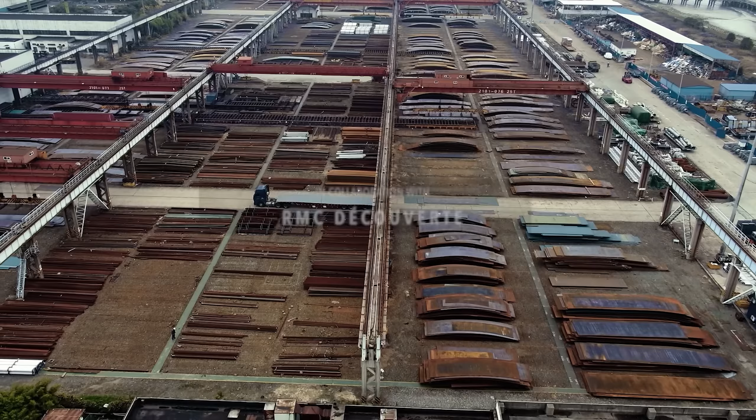Just a few kilometers from Shanghai in northeastern China, thousands of women and men work in a humongous shipyard. This extraordinary project is an unparalleled technical and human challenge. Not one, but 9 container ships are built here. These 9 steel giants are among the largest in the world. The work will take place simultaneously and will last just under 2 years.

The shipping company behind this new generation of ships is France's CMA CGM, a world leader in ocean transportation. These giants will transport an enormous amount of goods, approximately 215,000 tons per freighter.

The first is the Jacques Saade.

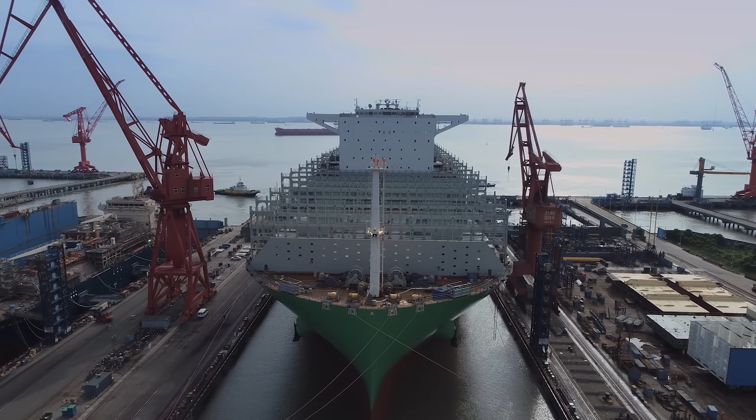These ships mark a turning point in nautical transportation due to a revolution in the engine's energy supply of liquefied natural gas.

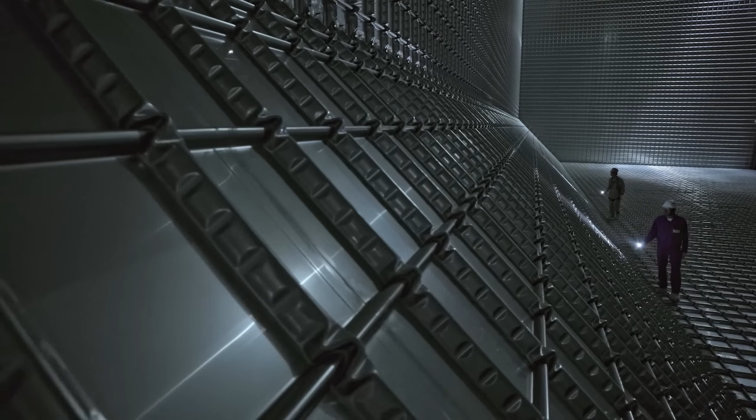A symbol of this innovation, a revolutionary tank filled with liquid natural gas, cooled to -161 degrees. The liquid natural gas is more environmentally friendly than oil. It powers a unique motor, the largest natural gas-powered engine ever built. It's just under 20 meters high, about as tall as a 6-story building. This engine drives a huge propeller, 10 meters in diameter.

Each of these ships is capable of carrying 23,000 containers. Lined up in a row, they'd cover a length of 150 kilometers.

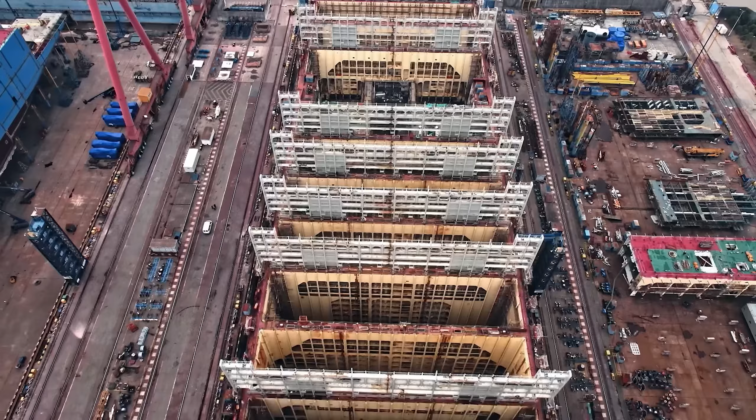We follow the construction site manager and shipboard commander into the heart of the command center and get to experience the key moments in the construction of these mega ships up close.

Will it be possible to complete the 9 giants in a record amount of time? What technology is used in such a gigantic shipyard?

The story of these container ships presents a massive challenge. How do you build 9 ships in less than 2 years when it normally takes 18 months to build just one?

This gigantic shipyard was built to make it happen. There's enough space here for all 9 ships and the necessary infrastructure.

The shipyard is located on the other side of the world, in China, just outside the city of Shanghai on Changxing Island. The shipbuilding facilities extend almost 4 kilometers.

There are 3 dry docks in the shipyard to get as much done as possible at the same time, so the ships can be worked on one after the other.

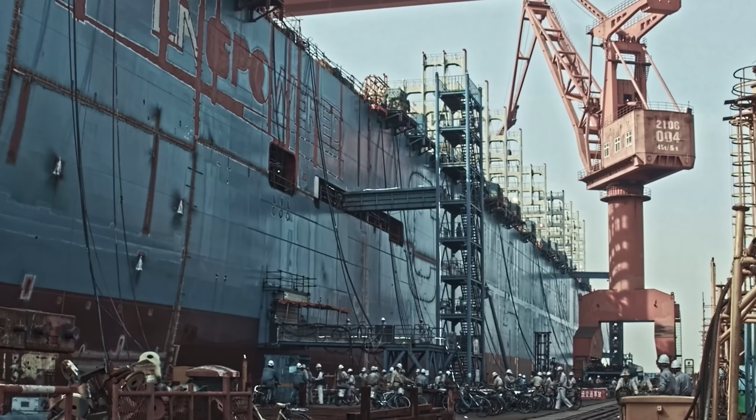There aren't many giant shipyards like this, where several dozen megaships are built each year. Most of them are located on the Asian continent, where there's a significant pool of expertise. The shipyard is like a city where more than 6,000 tradesmen, technicians, and engineers work from all over the world.

The challenge is enormous. Each ship will be able to load up to 23,000 containers. A first. The dimensions set completely new standards.

400 meters long, or the length of 4 soccer fields. 61 meters wide. Just under 78 meters high, that's higher than the Statue of Liberty. Without cargo, a ship like this weighs 70,000 tons.

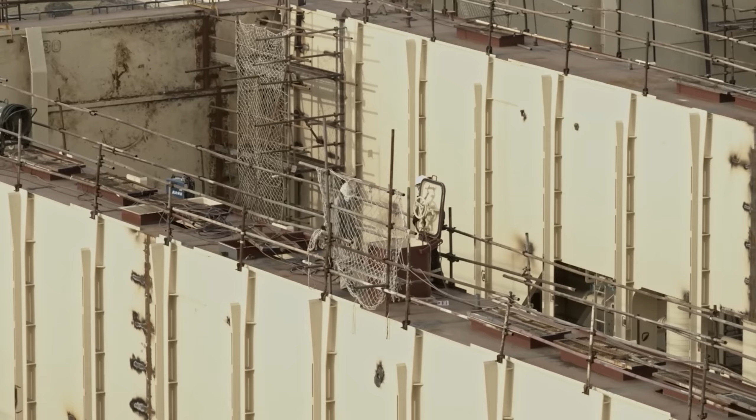Intense vigilance and rigorous organization are essential at all levels for these behemoths to be completed in time.

In one of the shipyard's many warehouses, workers are building a section of the ship called a block. A special system is used to coordinate the production of the 9 ships, similar to a giant Lego.

The ships are assembled in the dry docks in huge basins. One by one, the blocks are delivered and welded together, an extremely efficient construction method. Each block has a precise function and specific place in the overall construction of the ship.

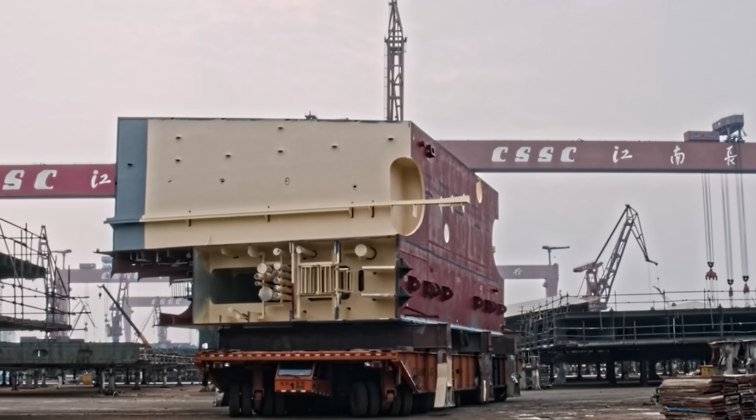To produce these giant vessels without wasting time, the construction plan was broken down into thousands of independent blocks, like an assembly line. And to save even more time, everything's already installed: piping, fittings, ready to be connected.

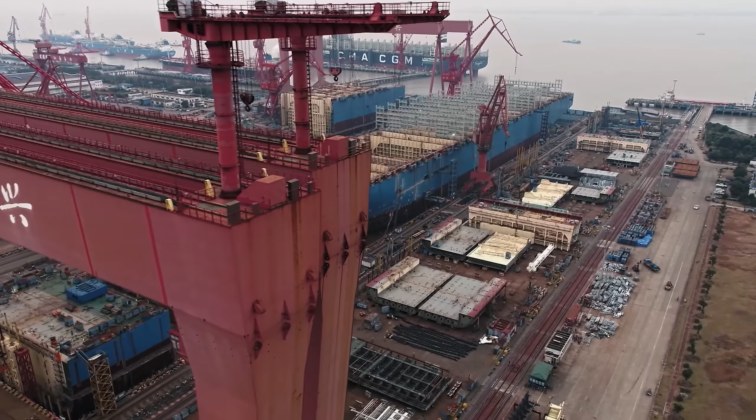These huge parts are brought to the center of the shipyard near the dry docks, where they're mounted on the part of the ship already built. Like a skeleton, every single part of the ship becomes visible.

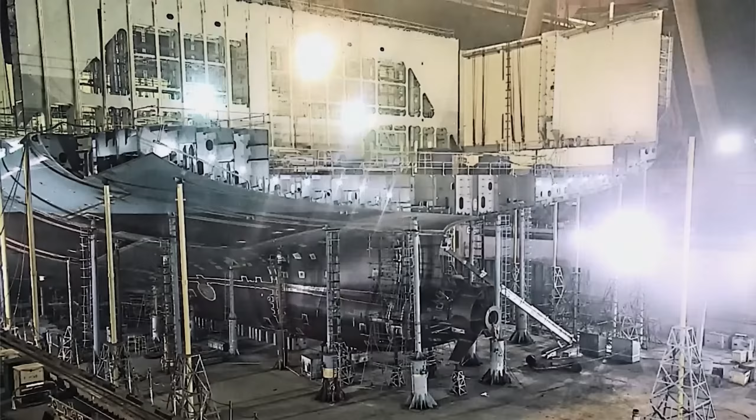All parts need to be assembled with surgical precision.

Part of the tail, consisting of 5 blocks, slowly moves towards the basin like a spaceship from Star Wars. 790 tons, the weight of 2 high-speed trains, floats in the air.

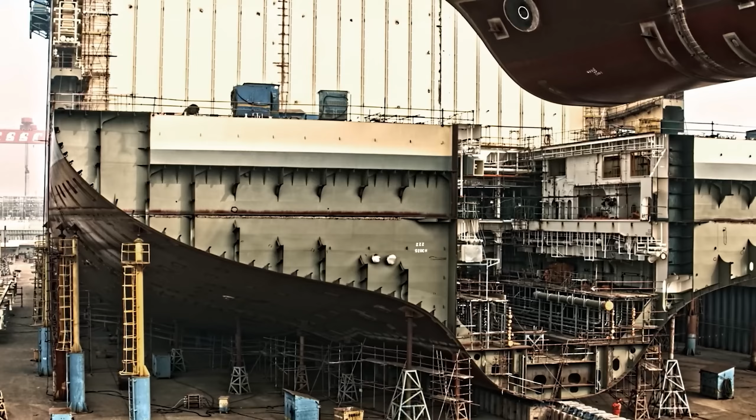No problem for the massive port cranes, which can lift up to 600 tons. 2 cranes work together, and the assembly of the massive parts has to be perfect.

But how's it possible to build the ship without blocking access to the bottom of the ship? How can individual parts be protected from getting damaged on the ground?

The trick? Small, incredibly stable support beams, known in technical jargon as pawls. The pawls are placed on the bottom of the basin so the ship can be placed on top. A pawl consists of a concrete block with a metal structure attached on top.

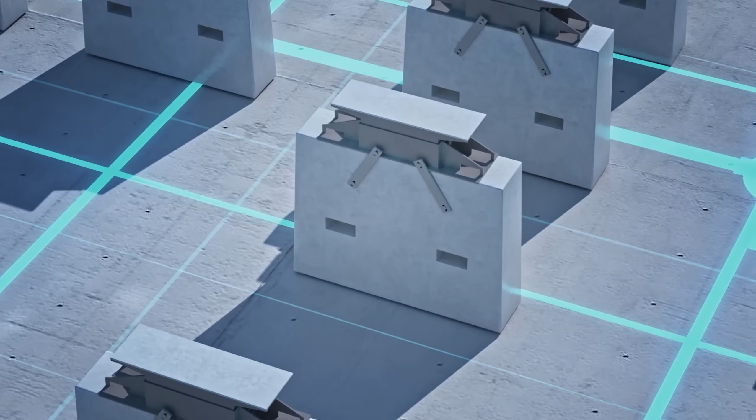Each one can carry 200 tons without damaging the hull. Together, the pawls support the weight of the completed ship, nearly 70,000 tons. Everything's ready for the next mega ship to be assembled.

In the beginning, there was sheet metal, 12,661 steel sheets. They're the raw material for the structure of container ships.

Just like cells in the human body, they're delivered by sea, by the hundreds.

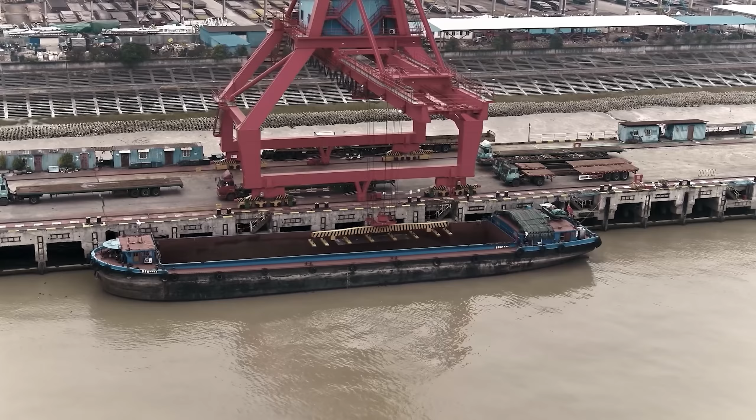The structure of the ship is made of these sheets, mainly steel, a material that can be used over and over again.

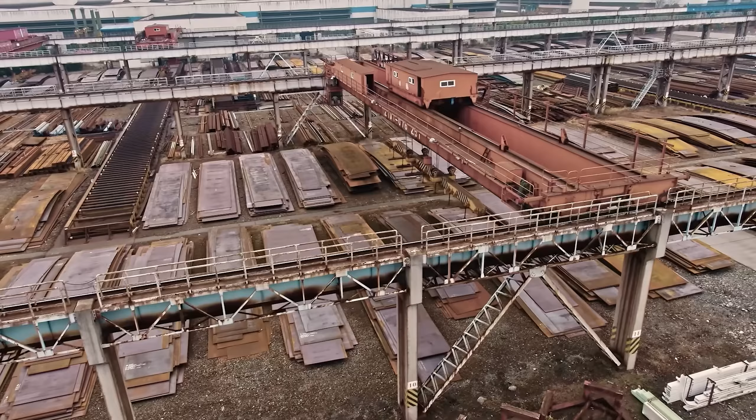But why are increasingly larger container ships still being built? Reducing the cost of transportation isn't the only reason, environmental factors also play a vital role. If 23,000 containers can be transported by one ship, the life cycle assessment of each of these containers improves.

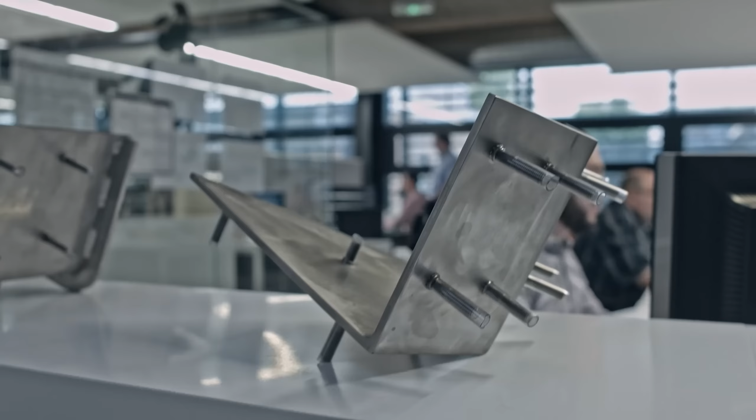But the engineers also face a second problem, a ship's independence. The majority of routes run between Asia and Europe, so fuel supply is an important core issue.

The fewer stops a ship has to make along the way, the lower cost and travel time. Container ships powered by liquefied natural gas have to cover enormous distances without any intermediate refueling. Storing such an enormous amount of liquefied natural gas on board presents a complex challenge.

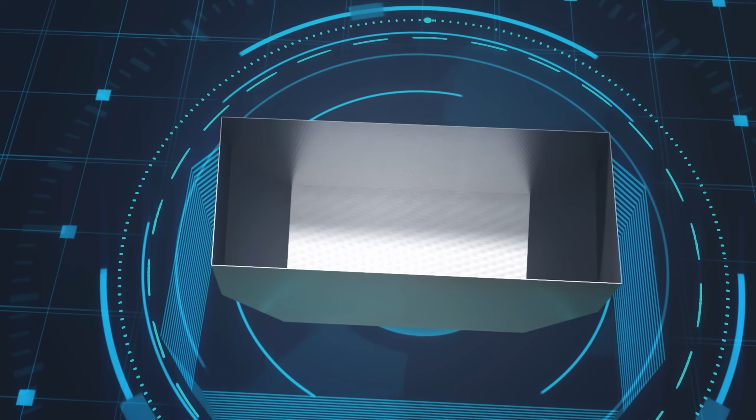The French company GTT, world market leader for liquefied natural gas tanks, developed a customized solution for this project. It's the largest tank ever built. 51 meters long, 27 meters wide, the tank measures 18,000 cubic meters, as much as 6 Olympic swimming pools.

The liquid gas offers a huge advantage and solves a familiar problem.

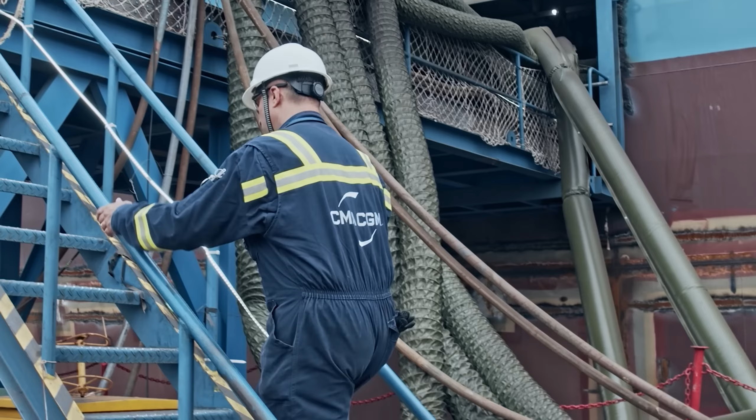After a 6-month phase of block assembly, a new stage begins: installing the tank. To do this, a block must be completely insulated, a lengthy and critical stage that requires meticulous precision, and which can last up to 9 months.

How can the natural gas be perfectly insulated at minus 161 degrees, in a tank exposed to wind and weather on the high seas?

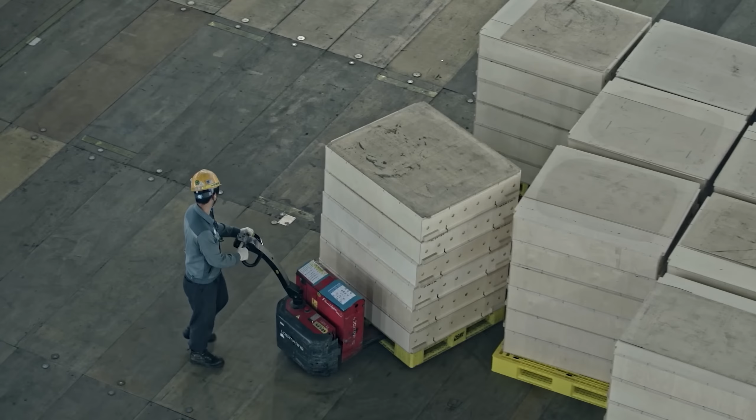To accomplish this, 27-centimeter thick sheets of polyurethane are used. They protect the outer walls from the extreme cold. The panels are glued to the walls of the tank and then fastened.

That's why the tank is divided into several levels, so workers can cover the entire surface of the huge hull, a work phase that takes 7 weeks.

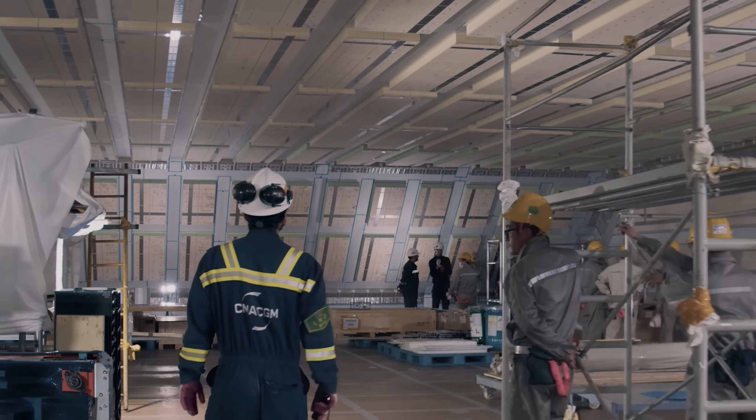The first layer of insulation is ready, but is it absolutely airtight too? Even though it's always a race against time on the construction site, the crews still have to make sure everything's working properly and check every single seam. The work is divided into inspection zones.

A leak was found here. In such cases, technicians use an efficient method, which is surprisingly simple.

Water. The affected section is covered with soapy water. Then this plexiglass box is used. A vacuum is created inside with a pump. If air bubbles escape through the inner wall, it proves the seam isn't completely airtight.

Then you need to glue that spot again, of course in a timely manner. It's important not to waste a minute. The procedure needs to be repeated on the lower levels.

The countdown continues. After 16 weeks, the first stage of installing the tank is complete. A second, much longer stage is about to begin.

The tank is the energy reservoir of the ship. From here, the liquefied natural gas is routed to the engine.

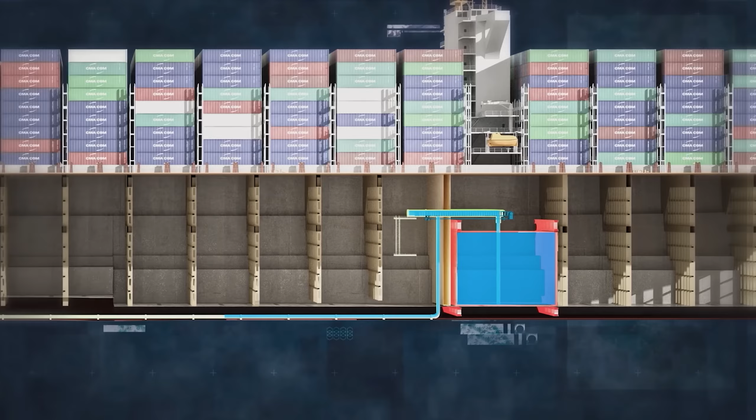The problem is, both the gas volume and the distance to be covered are extensive. Because of balancing, the engine is located at the other end of the ship. So a suction mechanism needs to be built into the tank.

Here it comes. Its weight, 25 tons. Its task, to pump the gas to the engine. Its name, the gas mast.

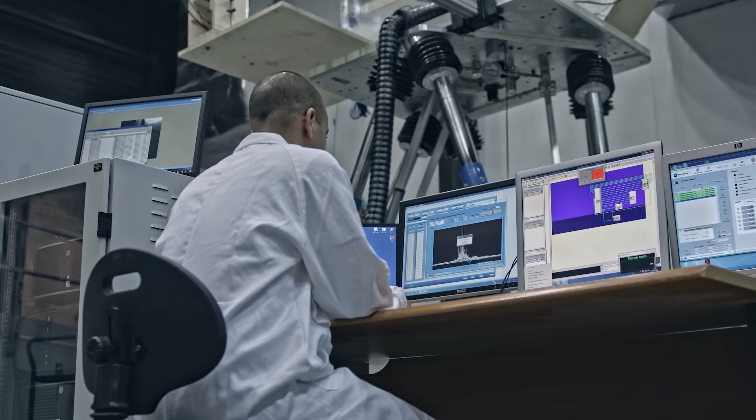The engineers had to design a mast that is virtually indestructible because it needs to withstand extreme conditions in the tank.

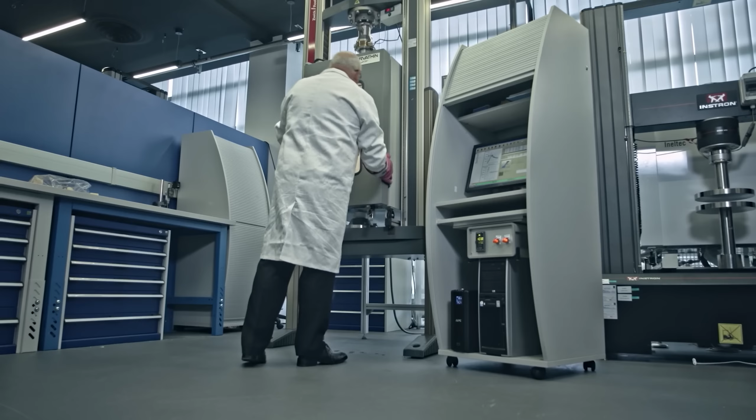The mast needs to withstand freezing cold and enormous pressure without moving even a millimeter, and do that for several years.

Work continues at the enormous Shanghai shipyard. A tank obtained its first layer of insulation on one of the container ships. Now a second one can be attached, but the gas mast needs to be installed before that.

It's lowered into the tank from the top. The mast is 6 meters wide, and the opening through which it's lowered is barely larger.

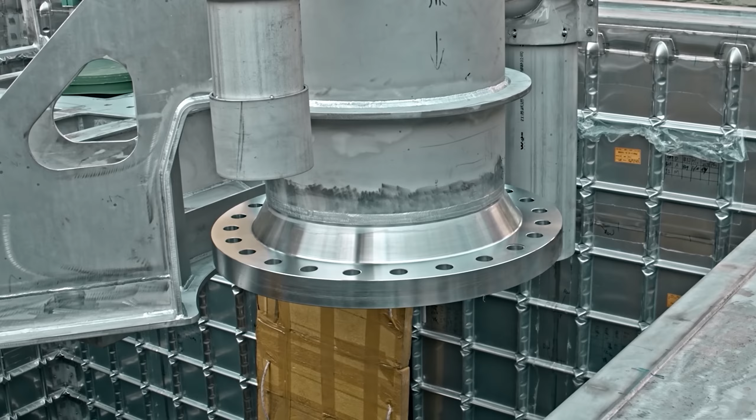The mast is lowered centimeter by centimeter. Around 15 workers are involved in this delicate operation. The metal monster floats in the air.

Finally, the mast is now securely attached. There are 4 pumps at the lower end, just a few centimeters above the bottom of the tank. They pump every drop of the liquid gas.

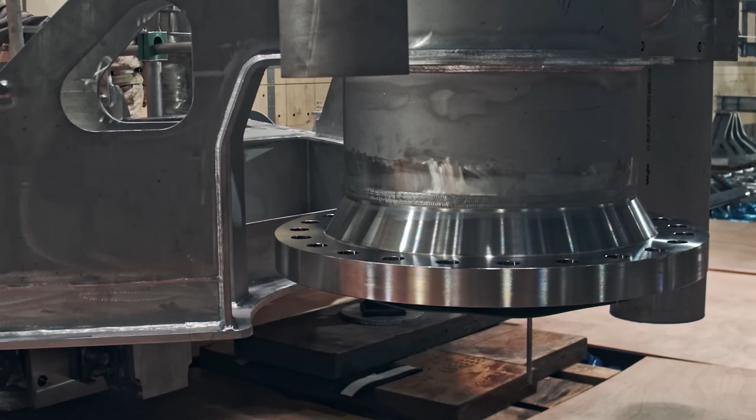A device that's proven its reliability. Now the tank's last layer of insulation is added, the so-called primary membrane, a 1.2 millimeter thick sheet metal. It's what gives the tanks their waffle-like surface structure.

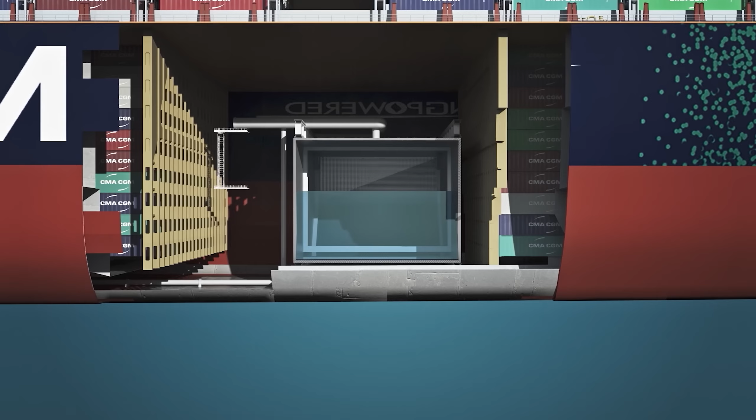This membrane is ultra-thin and at the same time incredibly efficient. The intense cold of the liquefied gas causes the steel to warp, so it's crucial that the structure itself is flexible.

The embossed membrane with its wavy edges offers the perfect solution.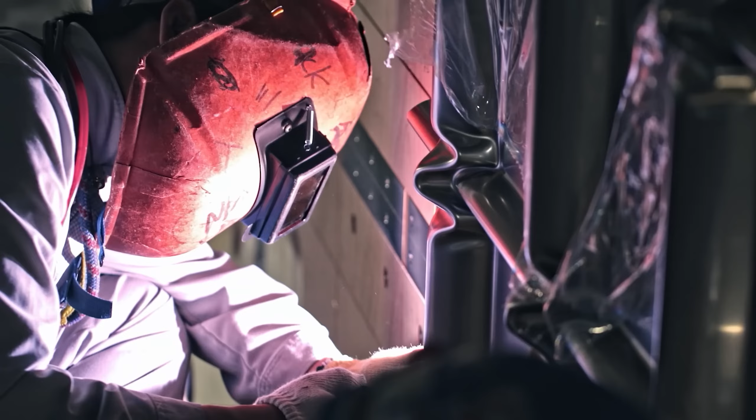Weld seams totaling over 6 kilometers run through the tank. They're extremely resistant. The same technology is also used in space travel. After 8 months of work, the tank is finally ready.

A final inspection takes place before it's finally closed. Nothing, not the smallest speck of dust, is allowed to be left behind. The ship should be ready in 4 months.

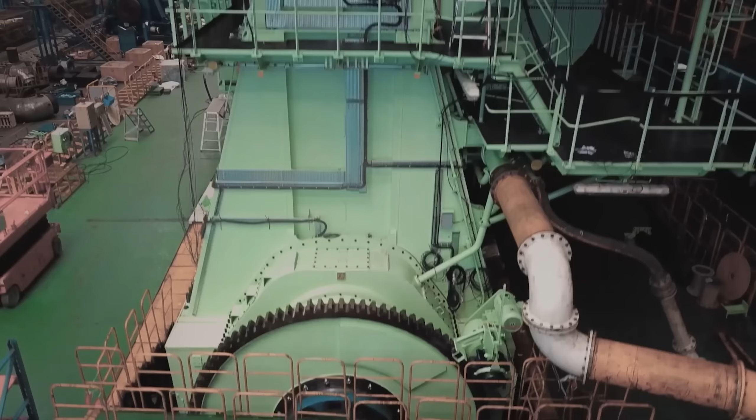Today, 3 months after work began, is a special day for the engineers. They've come to the mainland because one of the core pieces of the project is being completed in these halls today: one of the most spectacular individual parts of the ship, the engine.

With its 24 meters length, 18 meters height, and a weight of 2,000 tons, it generates an output of 85,000 horsepower.

A genuine independent construction. Before the engine's mounted in the ship, it's tested to the extreme. The engine's pushed to its limits, to 110% of its capacity.

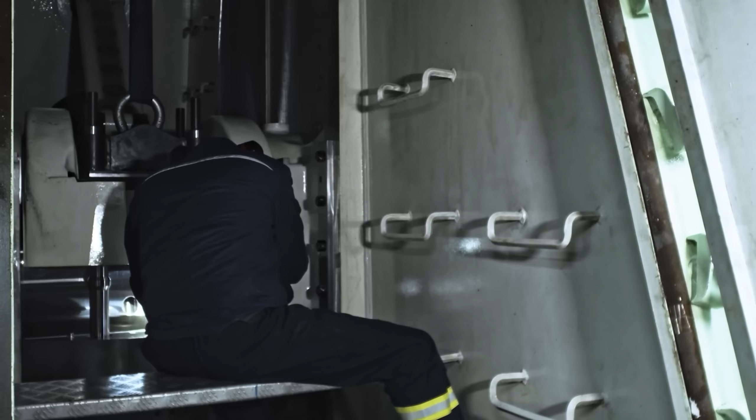This test is absolutely necessary to check the stability of the motor in extreme situations. Repairing this massive component on the open sea would be extremely complicated, and it was actually developed to simplify the work of mechanics. If there are any serious problems, mechanics can enter here to the center of the engine.

But the tests went well. The engine passes with flying colors. It'll be installed in one of the 9 container ships in a few days.

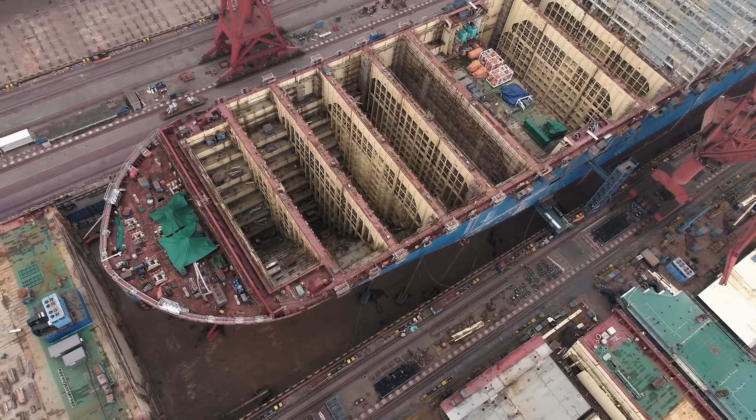Nine ships. That's 9 engines that have to be built in a very short amount of time. So they're manufactured just in time. The second engine's already being assembled just a few dozen meters away from the first engine.

A critical step is about to be taken. The main piece will now be delivered, the crankshaft. The crankshaft is the axle that connects the engine to the propeller and powers it. Its weight, 220 tons. It's mounted in the lower part of the engine and moves with the help of 12 pressure pistons.

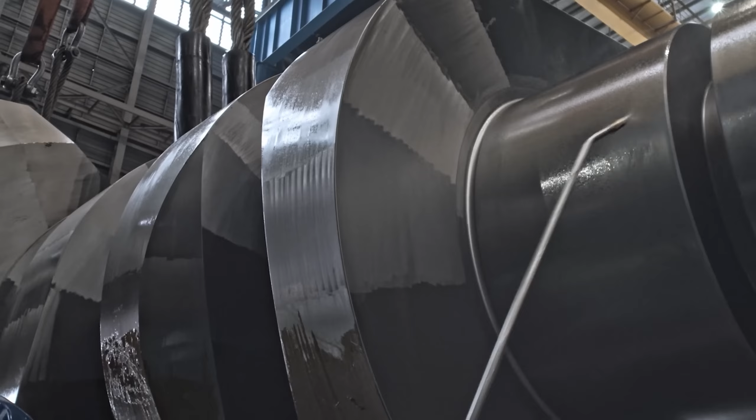First of all, the part is thoroughly oiled. The pressure pistons are connected later when the crankshaft's in place.

This is genuine engineering. Almost 220 tons are waiting to be installed. This is done with the help of extraordinary cranes.

So far, this is only half of the crankshaft. The 12 pressure pistons each have a diameter of 1 meter, that's 10 times more than a car. When running, they move 3.2 meters up and down.

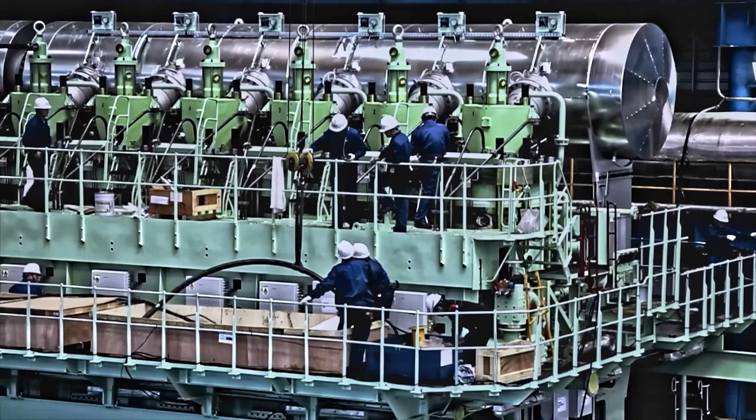The engine's now mounted onto one of the ships. But before that, it has to be taken apart to be brought on board. And it's not that simple. No vehicle in the world could move this 2,000-ton massive part.

That's why it's separated into 6 parts, transported individually by ship to the shipyard. This is the main part, it includes the crankshaft.

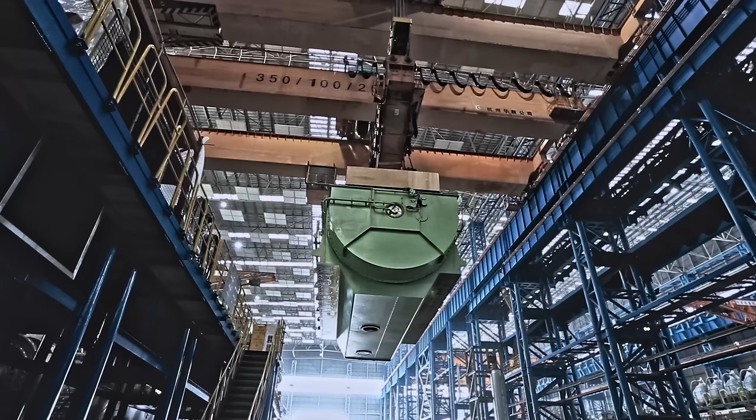The crankshaft is carefully lowered. With its weight of 220 tons, any unprotected contact with the ground would damage the metal, so it's carefully loaded onto beams. Even though the beams are temporary, they're still attached carefully.

Now this highly sensitive piece of the engine is loaded onto a peculiar cart.

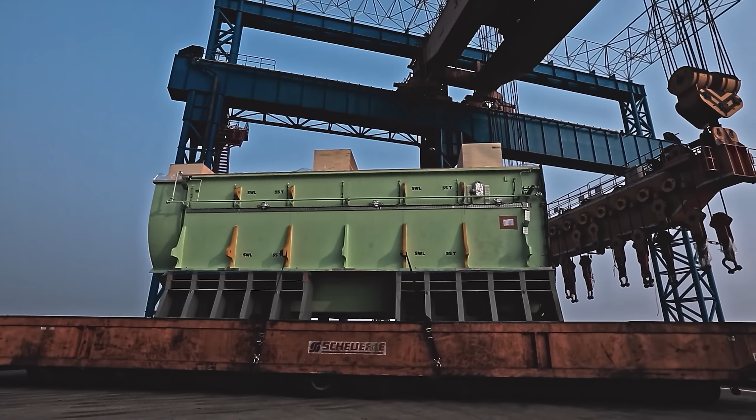To endure such a great weight, these transporters have up to 140 wheels. They weigh more than 10 semi-trucks, and they're controlled by remote control from a distance. Because safety's a top priority, the transporter only travels approximately 5 kilometers per hour.

The ship's already waiting when the transporter reaches the barge. The engine's loaded as slowly as possible. Everything's ready to transport it to the shipyard.

To get the container ships moving, which can weigh up to 300,000 tons when fully loaded, the propulsion system has a propeller with a very distinctive form. Their streamlined shape delivers increased performance.

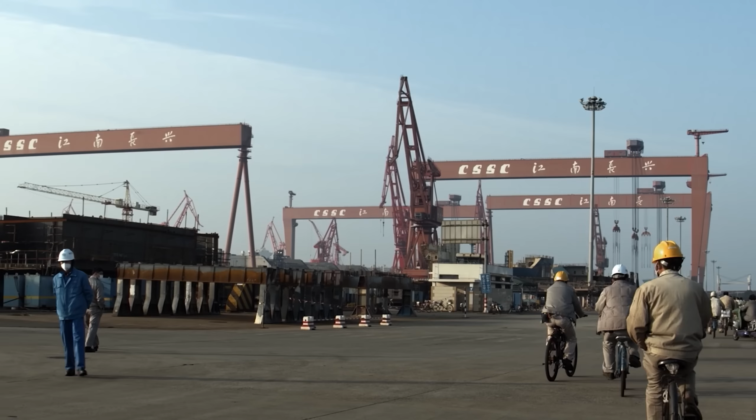Back on the island, in the heart of the shipyard. This part was designed in Germany and made in China.

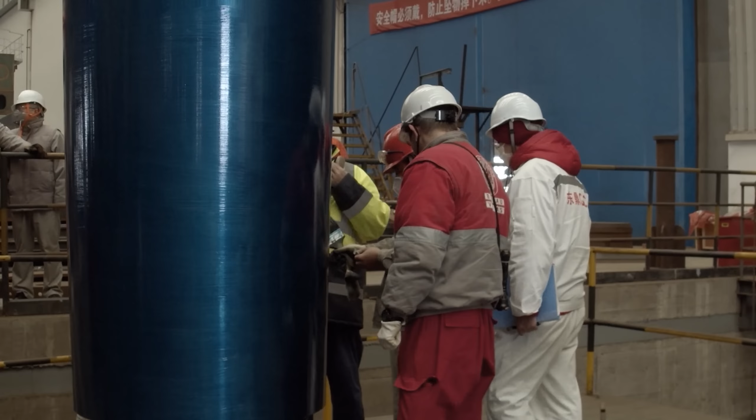In other words, the two parts have to be 100% aligned. There can't be any discrepancy whatsoever. At full speed, the slightest inaccuracy would have irreparable consequences. A dye is used to perform the test, methylene blue.

Now the two parts come together. The blue color shows exactly where the contact points are.

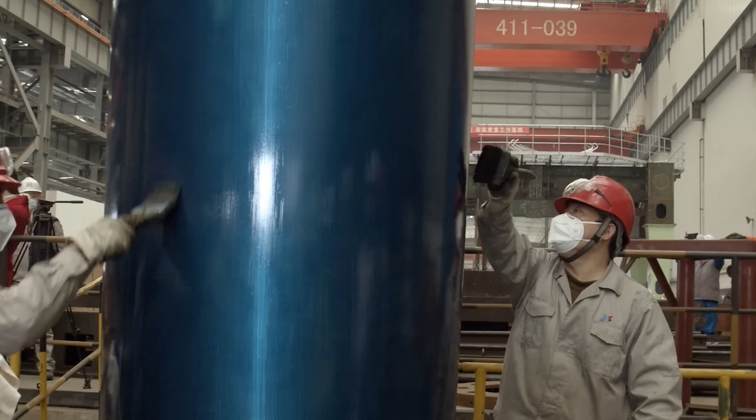A job of absolute precision, which can't be tampered with. 52.5. 5, 2. Okay, now 52, it's okay.

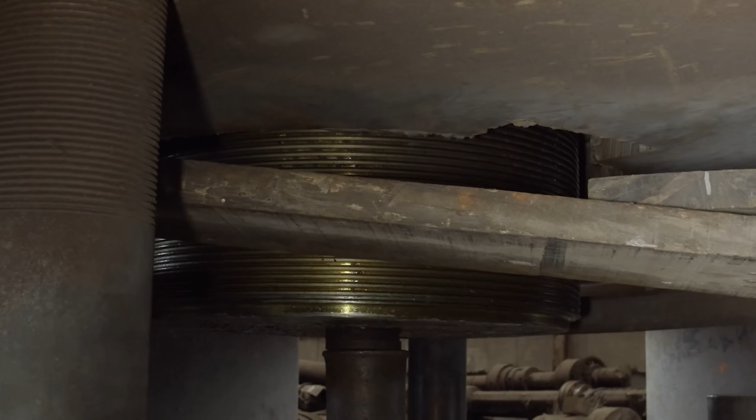The propeller shaft is raised one piece at a time. The propeller and propeller shaft fit perfectly into each other.

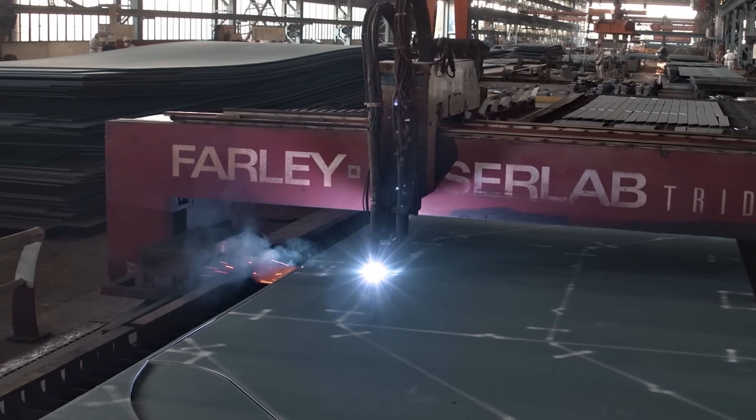The metal's cut with a laser beam, generating heat of approximately 18,000 degrees Celsius. It cuts the steel like butter. In total, more than 880 kilometers of metal sheets are required for one ship. That's the distance between Paris and Berlin.

There aren't any high-tech robots here and very few automated processes. Everything's done with industrial machines and human hands. Every worker has a place. This is where the first parts of a new ship are taking shape. These plates can now be assembled together to form new blocks.

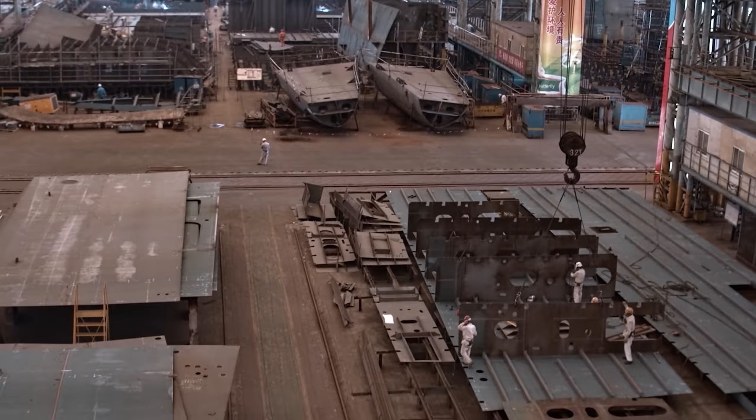Work at the shipyard is carried out in several stages: by design, expansion, and inspection. And now I want to see this, if it's good. It's now time to assemble the last block.

It's already waiting a few meters from the basin. André supervises the operation. The block is slowly lifted up, hovers in the air for several minutes, then fits perfectly in its place in the bow of the ship.

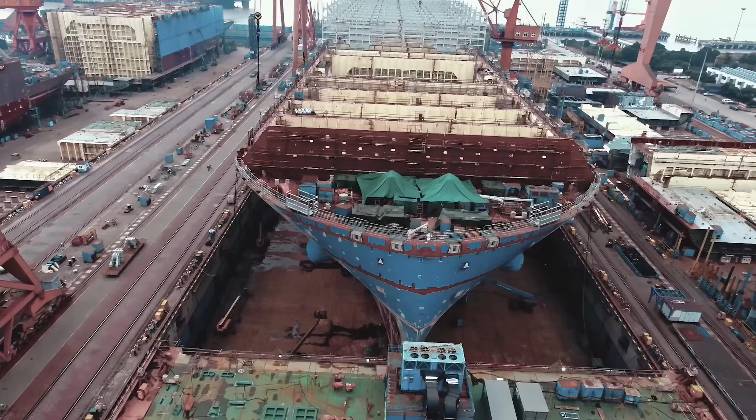Now it just needs to be welded in place, and the ship will be completely finished. These ships are gigantic metal construction sets, but they're also extra-large patchwork rugs. The connecting seams stretch across the entire hull like scars.

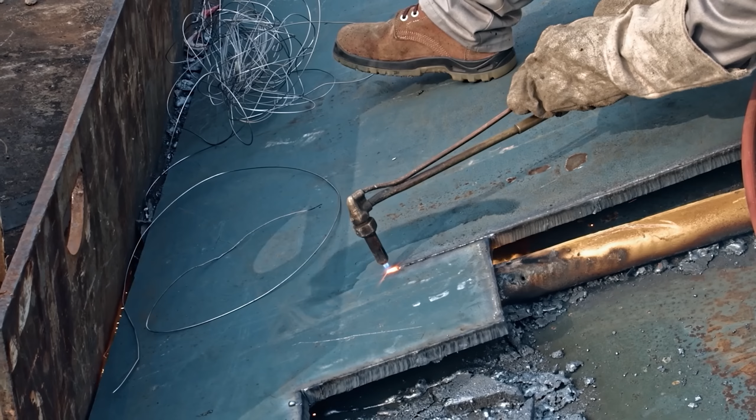Sparks are flying all over the shipyard. Thousands of sheets are welded at the same time. Once the ship's at sea, there can't be any structural weak points. Like a weak link in a chain, the slightest mistake at sea can mean disaster. That's why every weld is meticulously inspected and redone if necessary.

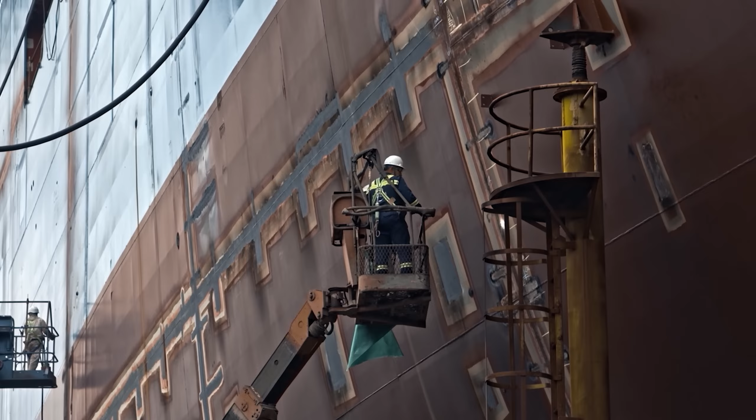The simultaneous construction of the 9 container ships continues. Now it's time to install the propeller. The installation on the lower part of the hull is a delicate matter.

The propeller was cast in one piece in a specially made mold. With its 92 tons and 10 meters in diameter, it can't be transported by air. So it's transported to the shipyard by ship. The last meters of the journey are conducted by massive cranes, which carefully load the propeller into the basin.

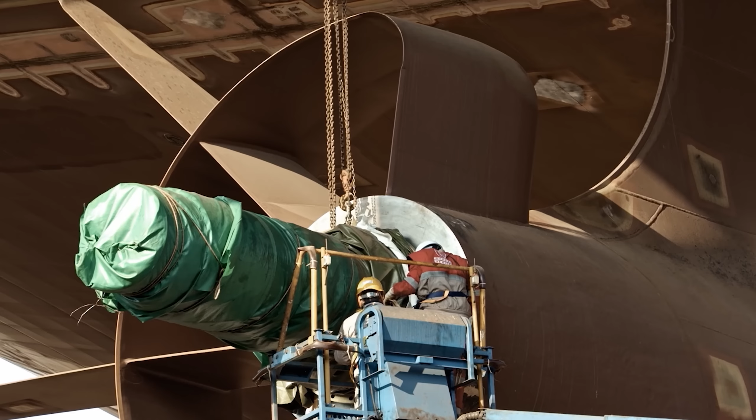The first thing that has to be done is to prepare the propeller shaft. Meticulous wrapping protects them from contamination. Nothing should interfere with the installation of the propeller.

Now the propellers slowly moved forward. Then, meter by meter, lifted and aligned. But how do you attach a 92-ton propeller? How do you manage to keep these massive parts completely still?

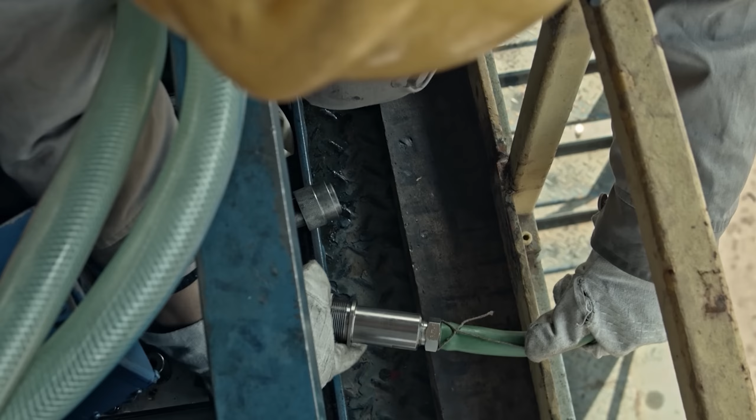The answer? Oil pressure. The men don't help. The propeller simply moved into place by oil pressure, where it's finally attached. Now the oil's injected. It's filled through this huge nut, and the propeller is precisely attached to its axis.

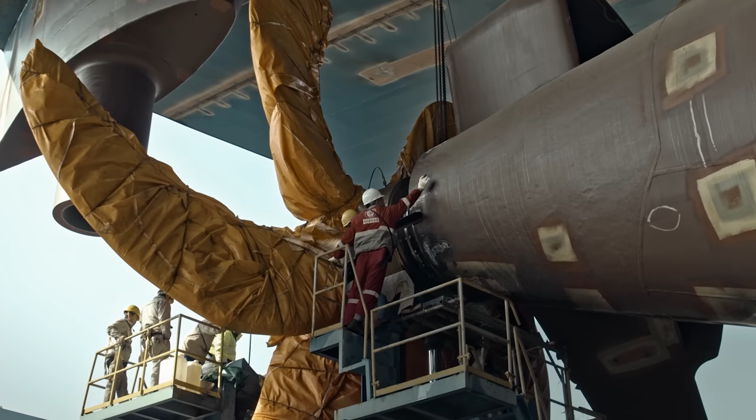The oil pressure increases as the entire team watches carefully. It's under constant observation. Adjustments take place directly on the hull, the old-fashioned way. Once the propeller's attached, the oil is collected to be reused later. Now the screw can be uncovered.

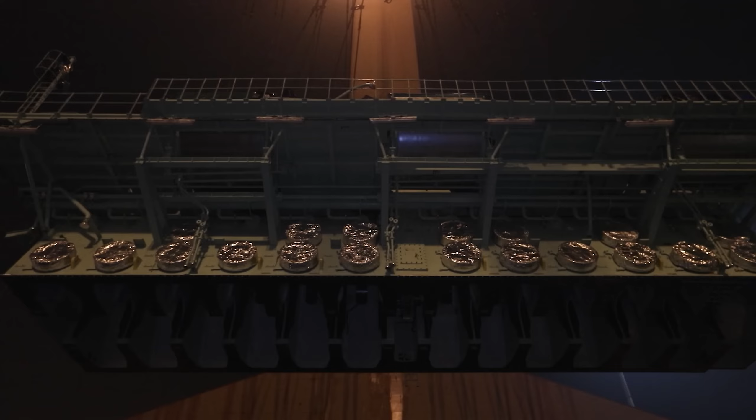Tonight, this brand new engine is reassembled. This time, however, directly on board the ship. This is the lid, the upper part, the last missing part of the engine. The ship has to be able to transport hundreds of thousands of tons of goods without anything slipping.

The massive piece hovers over the ship at a height of more than 20 meters before it's lowered into the heart. Everything's already prepared. The crankshaft and pressure pistons are just waiting for the last part of the engine to be inserted.

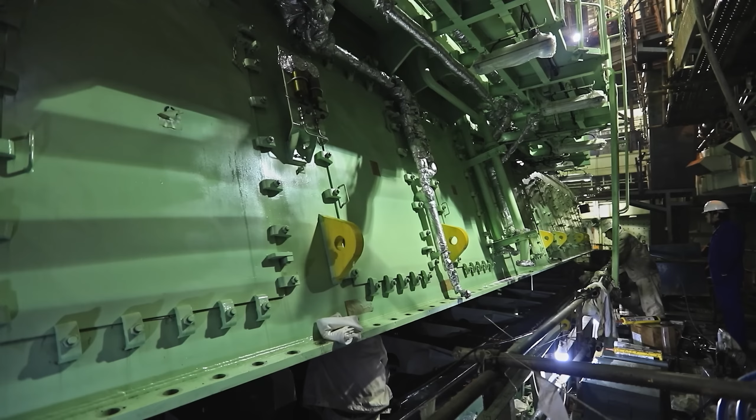Now the parts just need to be attached to each other.

The ocean's a particularly hostile environment where the hull is put to the test. The salt and friction erode the paint. It's possible that entire layers of paint peel off. This clearly slows down the ship. The ship needs to put more pressure on the engine to maintain its cruising speed.

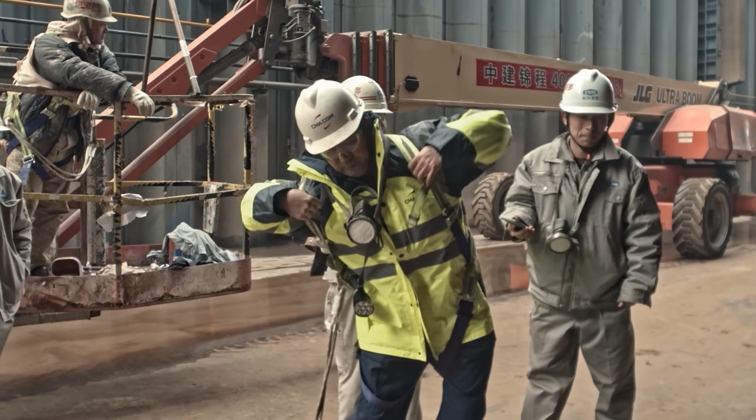Before applying the last layer, it's crucial to make sure the previous layer is perfect. And that's never the case on the first try. You can always find a mistake somewhere. An engineer examines the outcome himself. To be able to perform a comprehensive inspection, he climbs onto the freight elevator.

But an inspection like this can be dangerous. Whoa, whoa, whoa. Go down, down. At this altitude, the wind sways the gondola quite a bit.

If the ship's side isn't perfectly smooth, the spot is leveled with a grinding machine and repainted. So this is the remaining area. Once they cut, we will do the repair one more time. An enormous job that has to be carried out on each of the ships.

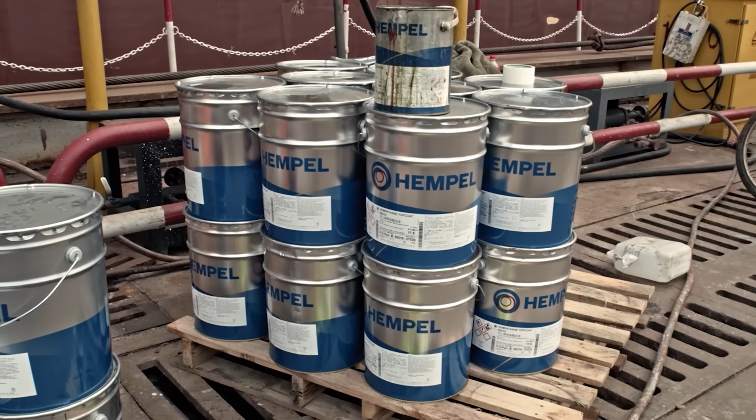The total area to be covered is around 950,000 square meters. That's the length of 135 soccer fields.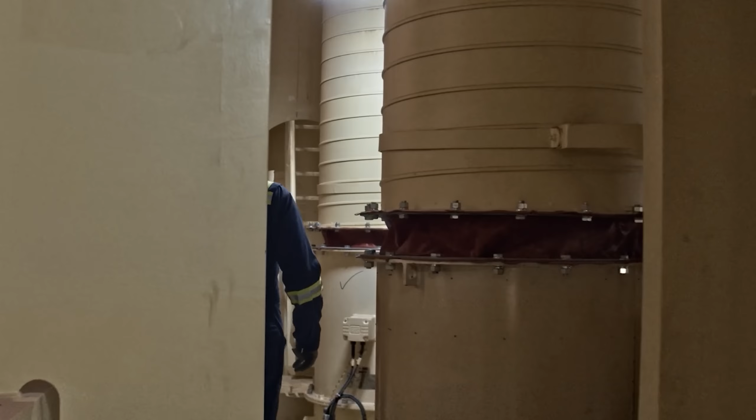Of course, the cargo also contains fresh products like fruits and vegetables. You need refrigerated containers for that. They're connected to the ship. The hold has to be permanently ventilated because it produces heat.

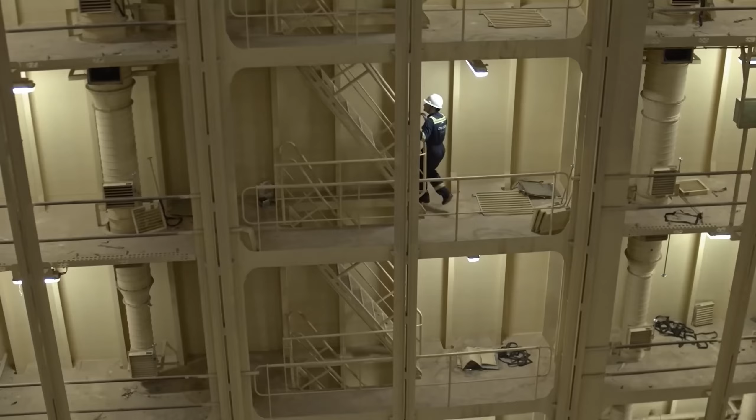The system's functionality is tested beforehand using a very particular method. A so-called container dummy is used for this, a replica that has the same dimensions as the real containers.

An engineer checks to see if there's a problem. The slightest twist or any other distortion of the rails is noted and corrected.

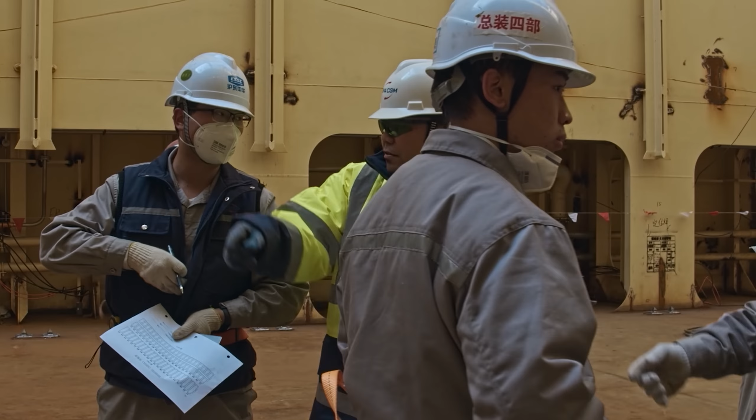The moorings in the ground are also inspected. The cargo shouldn't move at all while being transported. But everything seems to be under control. Today, the engineer of the shipyard has done his job.

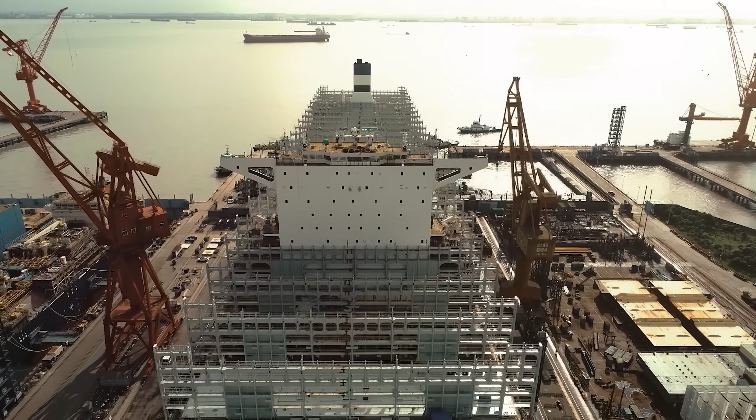Whether in calm or stormy seas, nothing's allowed to move. The containers must be prevented from falling into the ocean. To prevent this from happening, they're attached to the ship's structure above deck and to each other. This is done with so-called twist locks. Nothing can happen using this system, no matter how high the waves, no matter how bad the storm.

The place where everything on board comes together, the center, the brain, is the bridge. Matthieu's looking at it today. This is where the ship is steered when out on the ocean.

The command bridge is still under construction. Workers are now laying the last cables and connecting the navigation devices.

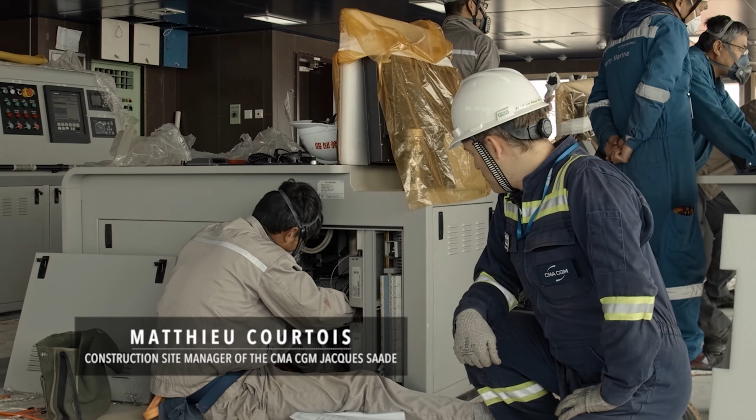In addition to all the high-tech gadgets, you'll also find a few very classic navigation aids.

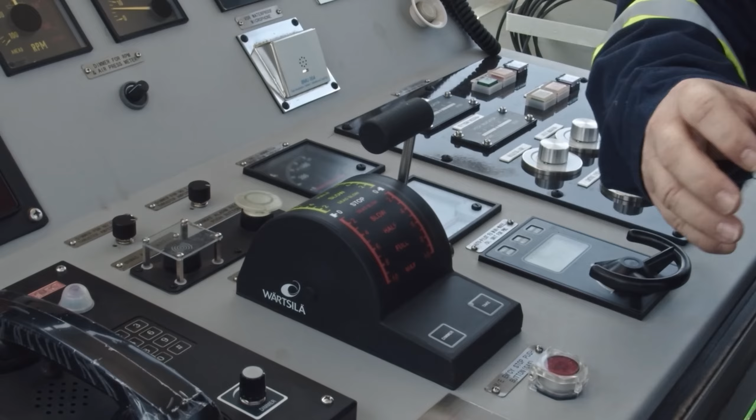A maneuver that requires a lot of sensitivity. It's executed at a speed of 0.4 kilometers per hour. The problem is, despite the low speed, you can never see the bow and stern of the 400-meter-long ship at the same time.

To solve this problem, a system called Smart Eyes is used. It contains 8 cameras distributed around the ship, providing an unimpeded view of the entire length. This allows the container ship to be moved close to the dock wall without great risk.

After a busy year and a half, the construction of the first container ship, the Jacques Saadé, is coming to an end. The other 8 ships will be completed over the next 8 months.

For the first time, the Jacques Saadé goes out to sea. There's a 15-day test phase where all the equipment is tested under real conditions. The tests are controlled from the command bridge, where all the equipment is interconnected.

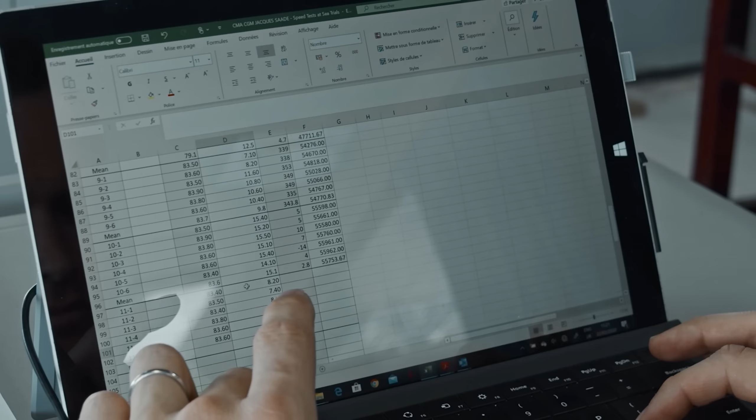But the equipment alone isn't enough. It's only an aid to navigation. A machine can never replace a human being. The experience of the team is what matters.

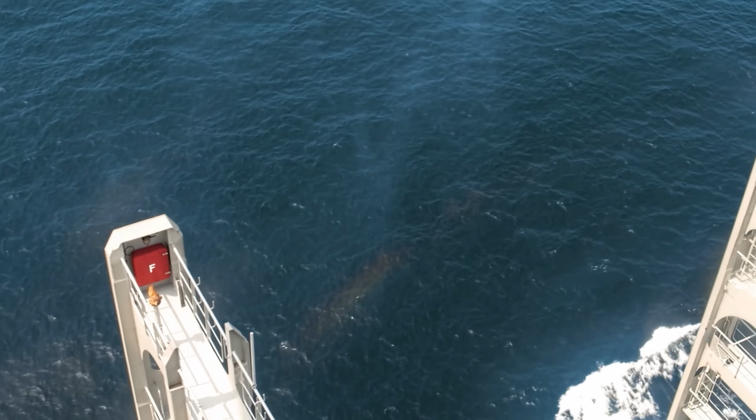When the engine's off, the ship should stop moving. Now comes one of the most symbolic pieces of equipment, the anchor, which of course is also inspected. Like the ship itself, the anchor is enormous.

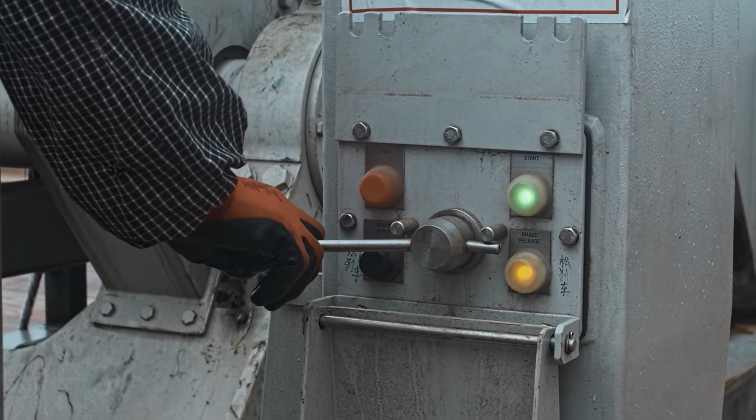And that doesn't even include the chain links. Each individual link weighs 300 kilos. The total chain weighs about 372 tons. That's more than the weight of 60 African elephants.

After a few minutes, the anchor rises to the surface. The ship appears ready to sail the world's oceans.

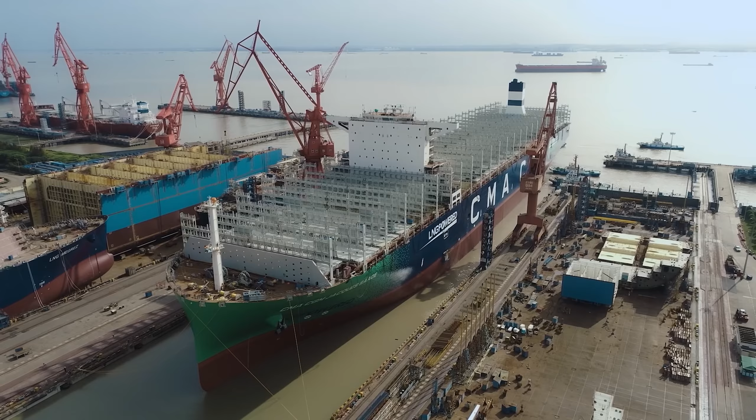With the inauguration of the first ship, the French shipyard has won the race against time. 9 gigantic revolutionary container ships were built in record time on this huge shipyard. The French company's gamble has paid off.

The first completed ships will soon be traveling their routes. The others will follow. The global flow of goods continues to increase. Today, 90% of freight is transported by sea. 100,000 cargo ships already navigate the seas, so improving their life cycle assessment is an important goal for our planet.

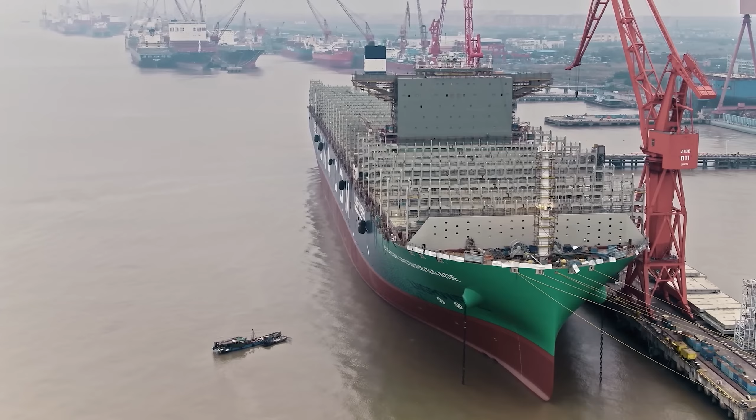Of course, constructing container ships like these is an enormous financial, economic, and technological challenge. But that's not all. These ships are also a great human adventure. Together, these dedicated women and men have accomplished a great achievement. Together, they overcame that challenge. A genuine challenge, as if made for the 21st century.